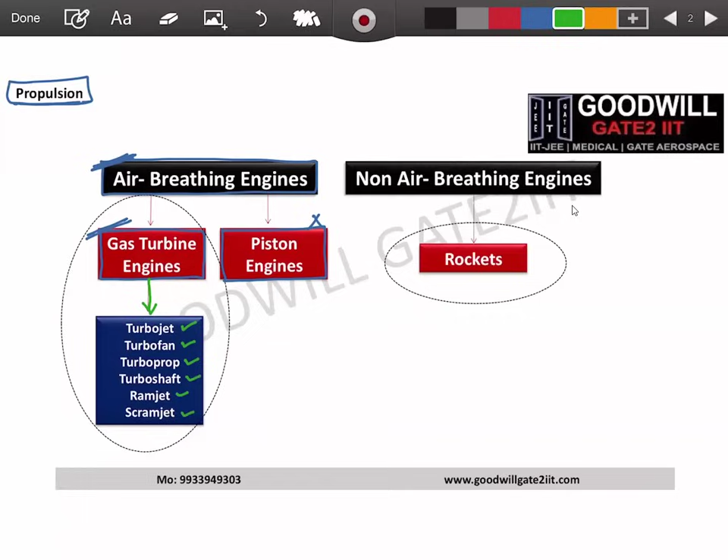So these are basically the two families of air breathing engines. And inside this, maybe you people have heard some keywords. If not, it's okay. We have turbojet, turbofan, turboprop, turboshaft, ramjet, scramjet in the gas turbine engine family, and there are many more, but these are basically coming in your GATE exams, or used in the industry and applications. Although scramjet is not, it's still very commonly asked in GATE. So your aircraft propulsion syllabus will first focus on all of these engines. Each engine we will study separately. This is air breathing.

Now, there is another set of engines known as non-air breathing, which doesn't need air. That means you can travel in vacuum. And the only name which comes to your mind is rockets. Rockets fly in vacuum, right? They go way above the Earth's atmosphere, to the moon, Mars, where we don't have air. So the second kind of engine in our GATE syllabus is the rocket engine.

So two specific engines. Once this whole series is done, ideally you should be able to solve each and every theory and numerical question, and answer all conceptual questions related to these engines, air breathing and non-air breathing. Rocket engines are your second unit, which we will start after finishing jet propulsion.

Now, moving forward, how does a propulsion engine look? A very typical example. This is not how each engine will look; there are small variations. But you will understand in the next 15 minutes how beautifully the engine family is constructed, why you have 5, 6 engines inside it, and how all these make sense. Before going into this complicated diagram, I simply want to tell you one thing, and you people know this.

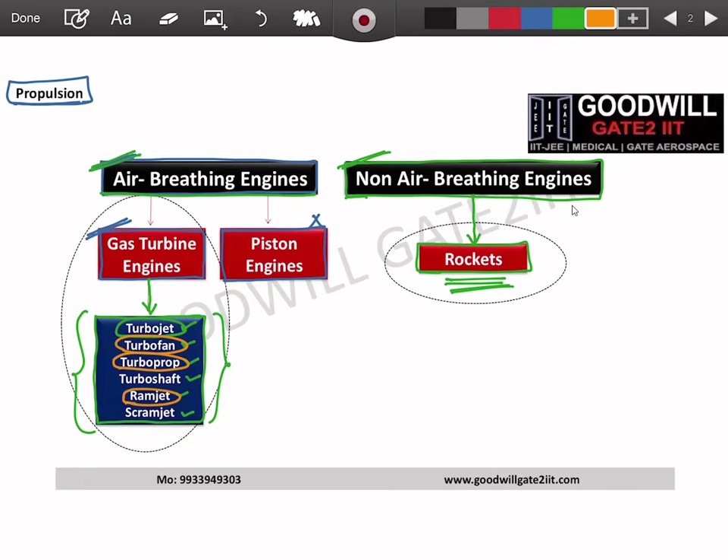So keep this in mind: any engine, whether you talk about turbojet, turbofan, turboprop, typically ramjet, turboprop, turboshaft slightly varies. I don't want to confuse you. Any engine, or even rockets, the primary motive is how you will get this high velocity coming outside the engine, because in the end you want to move forward.

Your whole engine design, and I'm making it very simple for you people, the only task of your engine is to produce this high velocity at the exit. And you will later see, higher the velocity, higher will be what we name thrust, and higher thrust means you will travel faster. And you know, engines can travel at subsonic speeds, supersonic speeds, even at hypersonic speeds.

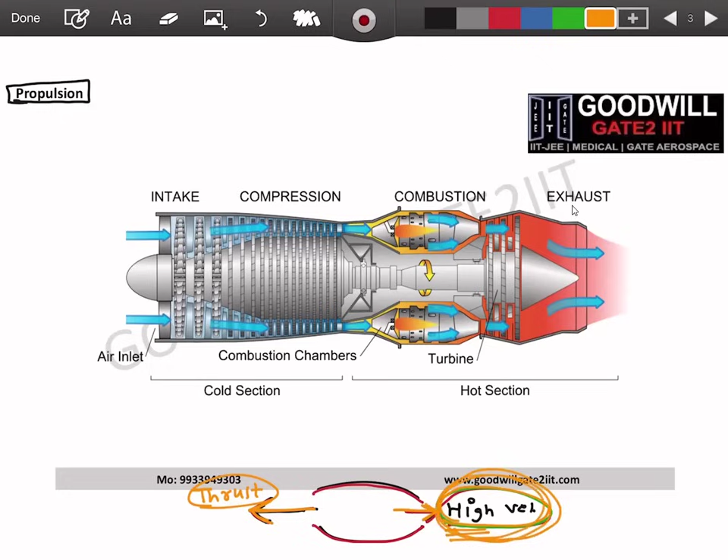Again, if you're not familiar with these words, it's perfectly fine. We'll move ahead. But keep one thing in mind, my whole lecture series on jet propulsion will be focusing only and only on how we're going to achieve this high velocity. All right. Now, to make you understand this, I have taken a schematic diagram of a turbojet engine, but this is just an example. We will talk about all engines.

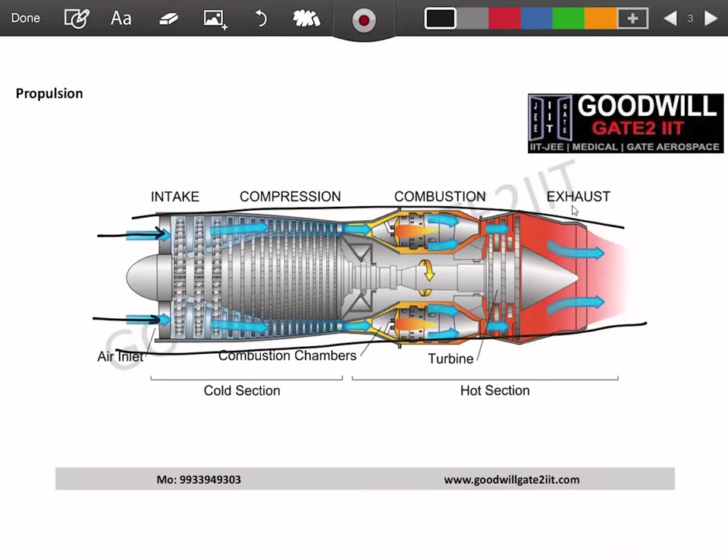So what happens in these engines is your air enters inside the engine. Keep in mind, you're going to put a cover on this engine and then it will be installed in your aircraft. If you remove this cover and look inside, you see some components, and you need not write anything, please. This is just an introduction. We will go into detail of each engine. Then we will write each component, their functions, whatever equations are required. Understand these 10-15 minutes first because I'm explaining your GATE syllabus.

So when your air enters, and everyone knows air enters from the atmosphere, correct? If your aircraft is flying at sea level, you're about to take off, then air from sea level enters inside the engine. If your aircraft is flying at an altitude of 11 kilometers, then air enters at 11 kilometers, or 15, then at 15, and so on. That means this air will have certain properties. I will go in detail about these properties today itself.

Let's say air enters at a velocity of, just as an example, 100 meters per second. As a very basic thumb rule, if this engine is working properly, my velocity at the exit should be, let's say, 500 meters per second. If your inlet velocity is 100 and outlet velocity is 500, this 500 is going to provide you a huge push, and hence this engine will produce what we know as thrust in the forward direction.

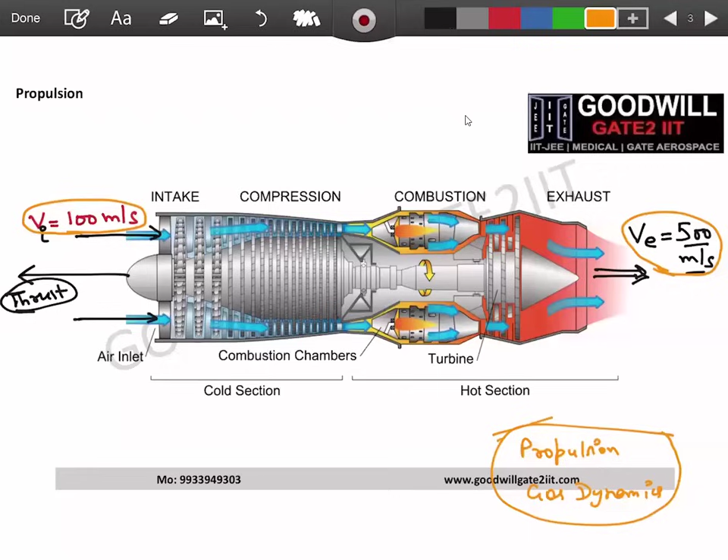That's the whole motive. Now the whole concept of jet propulsion is how you will increase this velocity from 100 at the entry to 500 at the exit. If you understand this, believe me, your whole propulsion and gas dynamics topics are over. Although gas dynamics is part of aerodynamics, both of these subjects only worry about this exit velocity. In the process, you will see shock wave formation, CD nozzles and so on. If you have not heard these terms, please don't worry. It is my responsibility that you understand everything slowly and get conceptually strong.

Now, please see what we will do. If you want to increase the velocity, a quick question to all of you. Do you agree that if your velocity is 100 and at the exit you want 500, I want higher energy at the exit? Guys, yes or no? At the entry your velocity is 100, at the exit you want 500. That means you need more energy at the exit.

Correct? And everyone knows that energy is conserved. Energy can neither be created nor destroyed. This is a thermodynamics law; I'm not going into it because it is not required, at least for today. That means somewhere, somehow, to increase this velocity from 100 to 500, you have to give some energy from outside to the system.

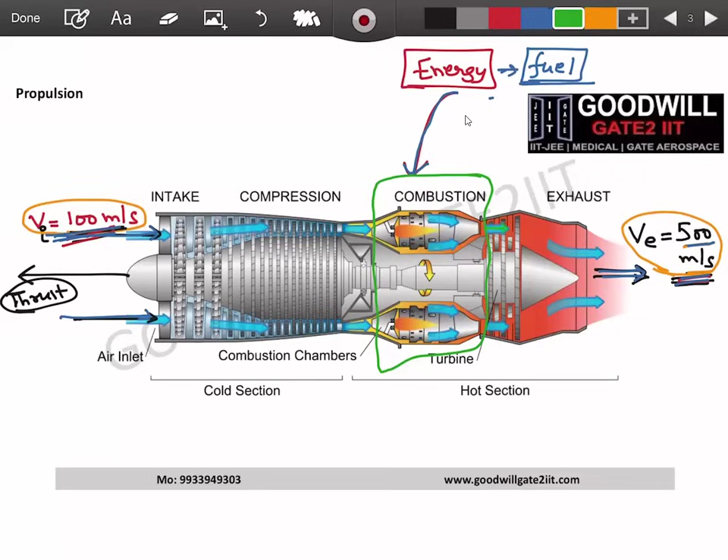All right. So thing is, we are going to burn fuel. So this part, if you see, is nothing but our combustion chamber in which air will enter. You will burn fuel, and fuel burned means more energy. And then with this high energy, you go out. This is fine. So everyone can understand why the combustion chamber is present. But the question is why you need all these components which are making your engine so lengthy and big.

Correct? So the thing is, it works something like this. Please neglect these images for the time being. I'm just taking the help of a slide. Let me take a slide here. So let's say this is your combustion chamber. This box is your combustion chamber. I'm just giving you an example.

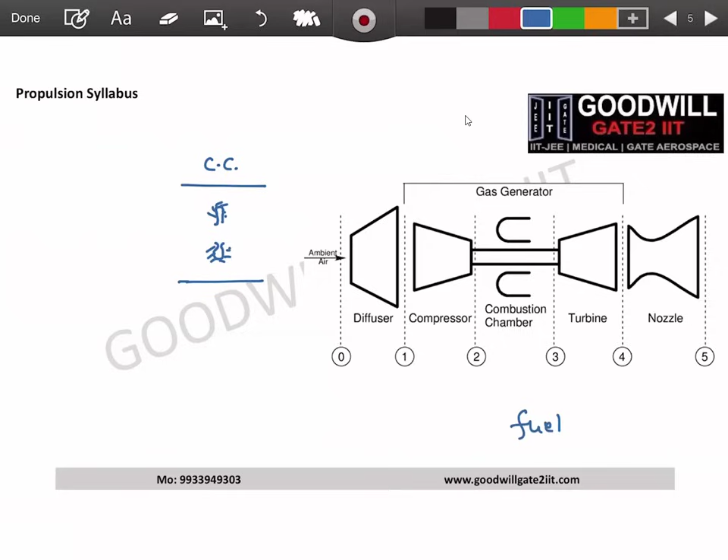And in the combustion chamber, you will put some flames by which you are going to burn the fuel. You need to ignite also, right? And keep this in mind, all fuels can only burn with air because they need oxygen to burn. So air should enter from here.

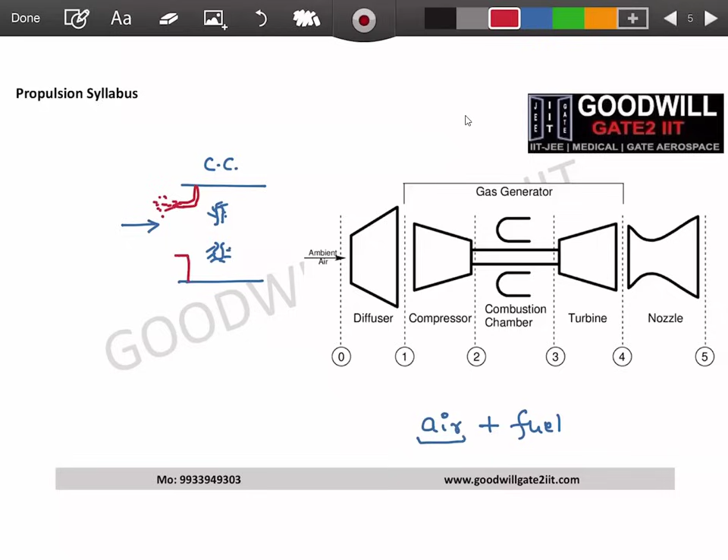Now what we will do is we will put some fuel over it. So we will have fuel nozzles which will spray fuel molecules like this. Your air comes like this. They both mix together, move forward, and you burn them. Once they are burned, you have high energy because energy of fuel is added. All right, this is how it should work.

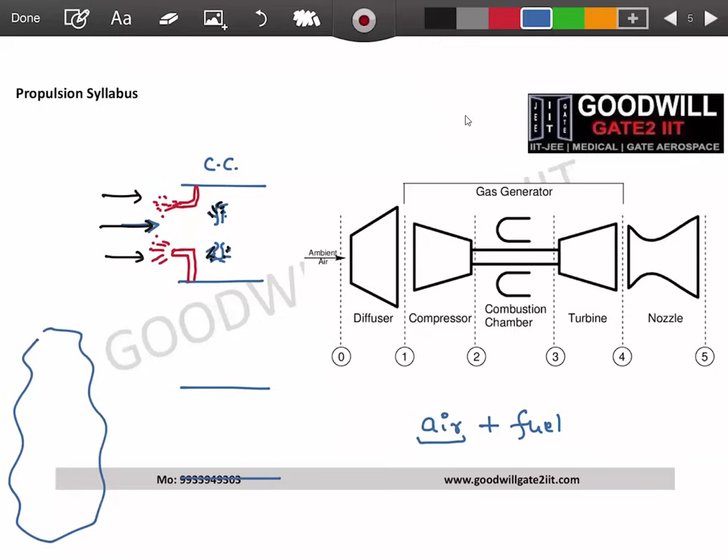Now think in this way. I have a combustion chamber like this, everything same. And now my air which is coming is not coming like this. My air is coming, let's say I have this much amount of volume of air at the entry. This is my air. Air molecules are coming like this.

Now, two things as a designer you people can do. One thing is, if you want to burn this air completely, you should make your combustion chamber very big so that every molecule of air enters. One thing.

Second, what you can do is, and what you have to do is, if you put a fuel nozzle here, which is spraying fuel like this, if this is very big, right, you can imagine that this air will pass without burning with fuel. So you are wasting the air at the entry. Correct, right?

To avoid this, what the designer thought is, let's do one thing. Before entering into the combustion chamber and before adding fuel to it, what we will do is we will compress this air. So the same air is compressed.

This is a very simple word. You have done this throughout your life. If I give you a box or anything and ask you to shrink it, you can just compress it and keep it in a smaller place, right? That's what you people have easily done. So what we have done, we have not reduced the amount of air. We have simply compressed the same volume of air into a smaller volume. But keep this in mind, molecules will remain the same.

At the exit, you will have poisonous gases coming out. You will see combustion chemical equations in the lectures. And if this combustion is not proper, if you people are not doing this compression properly and then this combustion properly, believe me, your aircraft will not be allowed to fly, because at the exit you can have poisonous gases coming out. You will not be allowed to fly with that particular engine. So combustion is a very, very important process.

So to accomplish this compression, so that you can have better compression, what people thought: let's put a compressor before a combustion chamber. And the whole task of this compressor is to compress the air. Even if you see from the entry, right? This is the entry, and at the exit, if you see, your compressor volume is reduced.

Please don't worry, this is just an introduction. You will have each and every answer for each and every statement. Why this compression? Why these number of? Why this diagram looks like this? What are these individual things? Please don't worry about it. I will go in detail. But at least you people understood what this compression is doing before the combustion chamber.

Now, you will learn this, that this compressor will rotate at very high speeds.

Now, it is really a bad idea. I think I need to stop allowing people to annotate. I think some people are annotating on the slide. It's okay. Let's move forward. Just give me 1 second. Okay.

So because this compressor is rotating at very high speeds, what people thought, it's very, very dangerous. Directly air enters and hits these blades. These are very expensive blades, guys. These compressor blades, you will find, are very expensive and very difficult to manufacture. So to make life easy for this person, there is a person before it which simply provides help for the compressor. In simple words, it's like this.

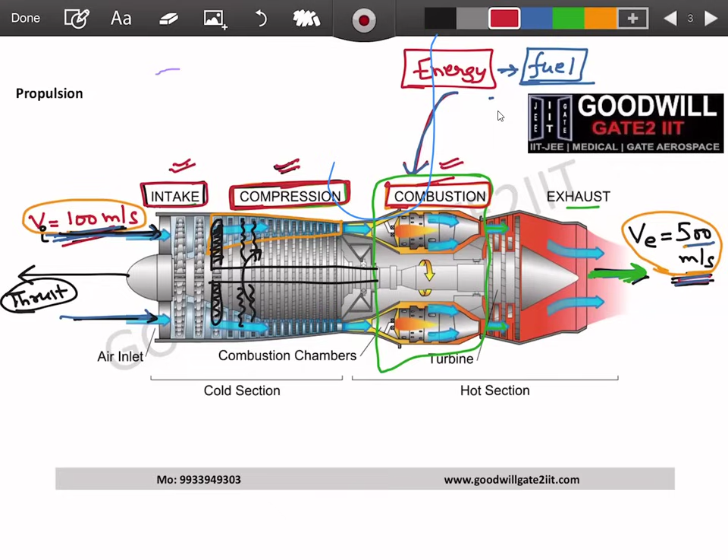Now, I just explained that this compressor is rotating at very high speeds. Correct? If your compressor is rotating at high speed, someone has to rotate it, right? You are not going to sit on the engine of your aircraft and rotate it by hand. It has to rotate on its own, right? And the purpose of the next component, which you name the turbine, is to drive this compressor. So what happens is this turbine will rotate and then this compressor will rotate.

And keep this in mind. Why do you want the compressor to rotate? Because you want to compress the air. And I assume you people don't know why, for compression, you need to rotate. You will learn this shortly. So your compressor needs to rotate, and to rotate it we have installed a person who will help the compressor rotate, which is nothing but your turbine. So after combustion, you have the turbine. Why only after? That also we will learn.

And once all these things are done, you have a proper exhaust pipe. Now this exhaust pipe can be of this shape, and you will learn later it can be of CD nozzle shape also if you want to work with supersonic flows. Again, don't worry about it.

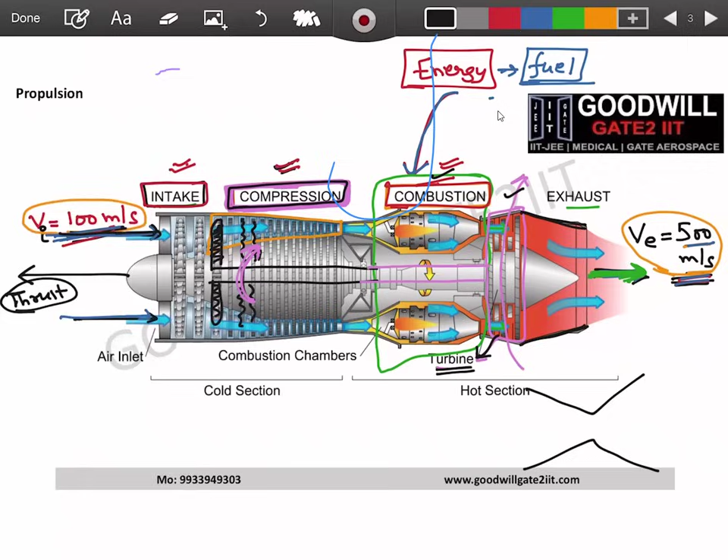So if you broadly see these components, right, you have the intake to help the compressor. The compressor will help combustion. Then you have the turbine, which will again help the compressor. And then to get things out, you have used an exhaust pipe. This is basically the layout of the gas turbine engine family. In 5 minutes only, you will see what different kinds of engines and arrangements you can have.

Now, before going further, give me a quick thumbs up. Is it making sense up till now, whatever I've said? Do you have anything in mind which you want me to repeat? If it's okay, please tell me. We'll move forward. Is it clear for everyone? Perfect. Let's go ahead. Keep this in mind, I have not yet started my topic. Yes, we will discuss this, Divakar. Let's do it very, very slowly.

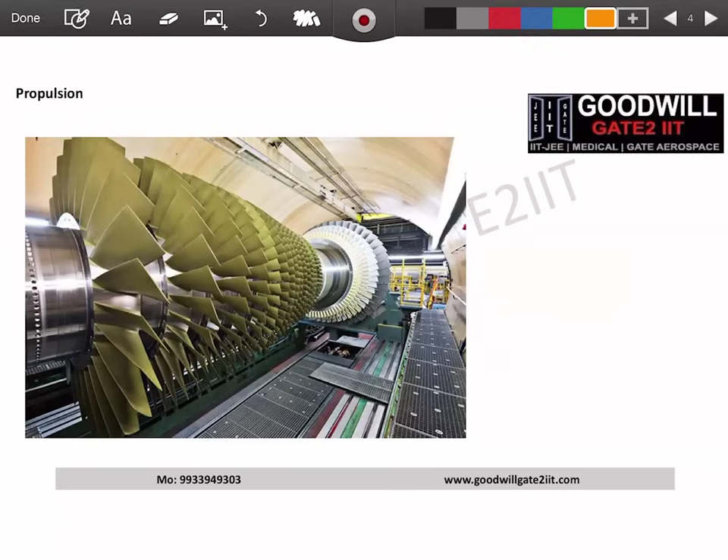So just to give you an example and to give you a feel, this is how an actual aircraft engine looks. This is a schematic diagram, which is basically for understanding things theoretically. If you see the next slide, right? This portion which you see from here till here is basically your compressor.

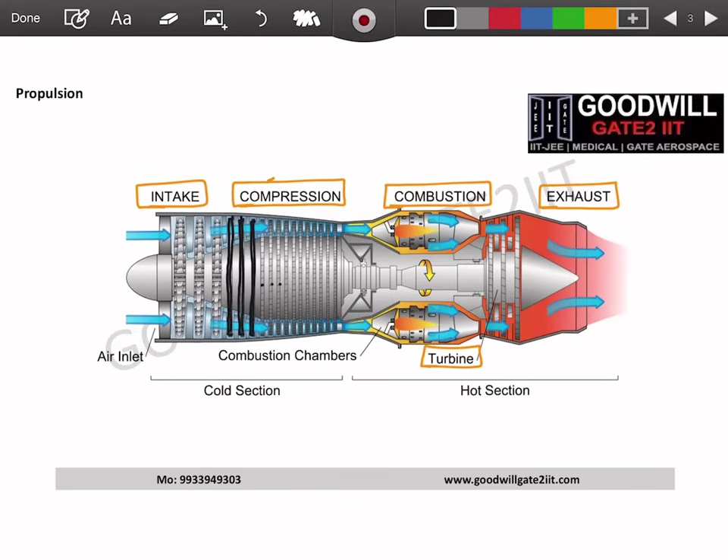And if you see in the compressor, you see these kind of blades, right? And then you see another blade row, another, which in this slide is represented here. You see, they are representing one line here, another line here, another line here, and you have 1, 2, 3, 4, 5, 6, 7, 8, 9, 10, and so many stages to be very precise. This is what's shown here.

Then in this zone, you will put your combustion chamber, because this is open to make you understand. And after this, you will have your turbine, which is again shown here. You can see how huge this engine is. And that's the reason this engine can produce thrust, which can propel your whole aircraft forward. And you have such big, huge aircraft, right? So your engine also needs to be powerful. So this is just an illustration of how it looks.

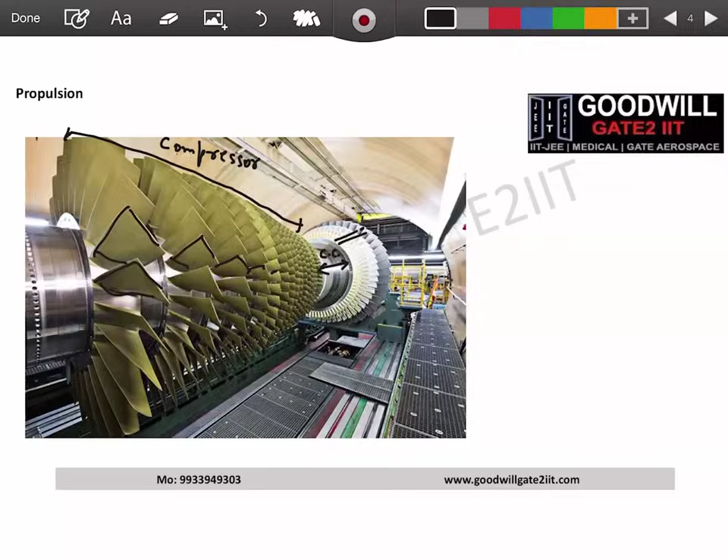Let's move forward. Again, coming back to academics. So the same design I have given here in a slightly easier way. So let's understand what our GATE syllabus is. Why they want you to understand this GATE syllabus, why they want you to crack this GATE exam, and then why this is required to enter into a job after clearing your exam or after doing your higher studies.

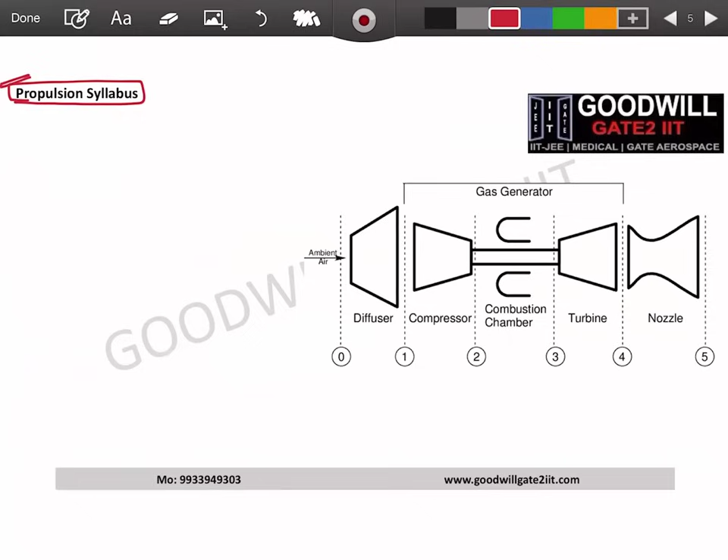Your first topic is known as jet propulsion, which we will start today. This jet propulsion will talk about gas turbine engines, all engines. So turbojet, turbofan, turboprop, turboshaft, ramjet, scramjet, whatever engine is present, we will talk about that engine in jet propulsion. All right, first topic.

Second chapter, if you see in your GATE syllabus, you will find the words axial flow compressor. I hope you understood, because the compressor is an important part of our engine. So we have to study the compressor, right? Why the compressor has so many stages, why the compressor is rotating, how the compressor is compressing the air. You cannot say it is a compressor, so it will compress the air. It has to do something, right, to compress the air. So we will study everything about the compressor.

But the thing is, there is not only one compressor. There are two kinds of compressors. One is the axial flow compressor and one is the centrifugal flow compressor. So in the GATE syllabus we will understand both of these compressors. So this is chapter 2 and chapter 3.

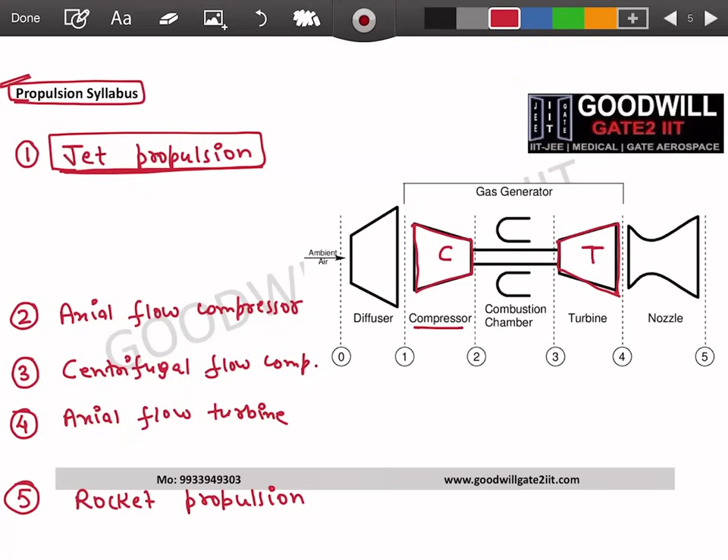And then, last but not the least, we have to talk about thermodynamics, right? Now, this is my way of taking it. Some people might follow a different route. When I start jet propulsion or any topic, I will make sure that all thermodynamic concepts are covered at the start only. So we will talk about isentropic flows, Brayton cycle, internal energy, enthalpy, entropy, all these things while doing this particular topic itself. But still, eventually, you should know thermodynamics. And in your GATE syllabus, you will find basics of thermodynamic principles mentioned.

Now, compressor is done, turbine is done. We have to study the combustion chamber, right? So if you want, you can name it as a separate chapter, but I will study the combustion chamber in chapter 1 only, because typically this is provided in all standard textbooks in this format. But if you want, you can name it chapter 7, combustion chamber. It's altogether a separate component, right? So we will study the combustion chamber. We have to.

Then we will study the intake. Again, 100% we have to study the intake. You will see it is also known as diffuser. It is also known as inlet. Inlet, intake, diffuser, all are the same keywords. So we will study this again in chapter 1. And then we will study nozzles, which is our last component. So we will go in detail into compressor, turbine, combustion chamber, diffuser, nozzle. And then once you have studied everything, we will talk about all sorts of engines. We will combine them and talk about the turbojet.

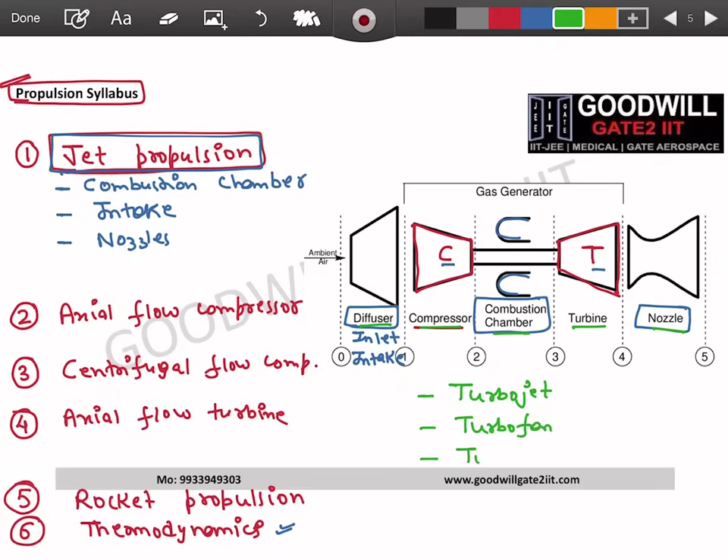We will talk about turbofan. We will talk about turboprop. And typically we will talk about ramjet. All of your GATE numericals from 2007 till 2025 will work on these three engines. There is only one question asked on turboprop, and believe me, that was just based on efficiency. So they have never entered into this.

And one theory question, out of all these years, only one theory question was asked on scramjet. So although we will cover this, we will understand the physics, we will solve some numericals, but only one question was asked on turboprop for 1 mark, one question asked on scramjet for 1 mark. All remaining questions are asked on these three engines.

And once all this is done, we will talk about some topics like afterburner. If you have not heard about this, keep this in mind. This is like producing extra thrust by burning more fuel. Maybe you have seen fighter aircraft producing very high thrust by burning a very large amount of fuel, and you can see a huge amount of flame coming outside the engine, right? That is typically afterburners, and we will talk about optimization of turbojet, turbofan, and so on. Many things will come.

Give me a quick nod, guys, and tell me if I'm making sense. You are following me. First thing, is your syllabus clear to you? There is no confusion in this. Because when you're starting anything, you should be clear what you're going to do for the next coming days, right?

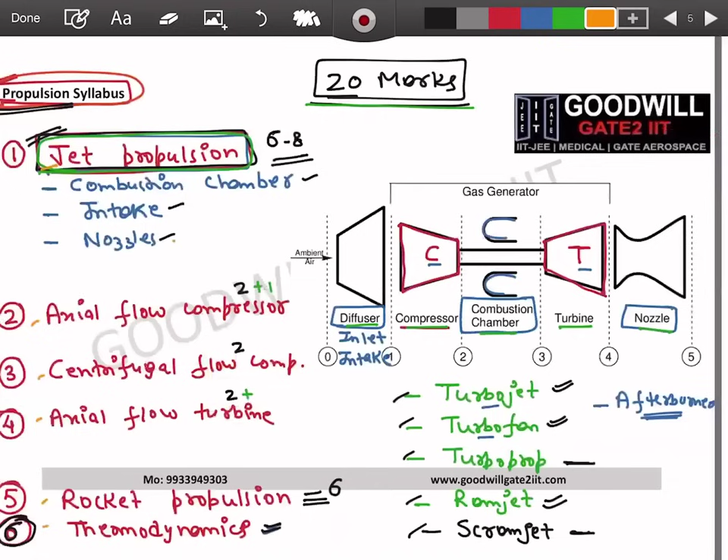I have already covered this part, which I have written here, rocket propulsion. And in rocket, you will learn all these things. Why you have first stage, second stage, third stage, why multi-stage rockets are designed. What do you mean by payload? What do you mean by strap-on motors? What do you mean by fuel and oxidizer carrying? And all these dual launch adapter, or every keyword you will understand in rockets.

And eventually you will learn at what velocity you should fire your rocket if you want to go to moon, or how much fuel you need, how much oxidizer you need if you want to go to Mars, how much fuel and oxidizer you need if you want to go to moon, or if you just want to launch a satellite in an orbit, low Earth orbit, or in a geosynchronous orbit. All these calculations will be done in rocket propulsion.

And believe me, guys, once you people are really good in rocket propulsion, after understanding this, they have beautifully framed your syllabus to transit to what is known as space mechanics. This is a separate subject for your GATE, but keep this in mind. Once your rocket is ready, then only you can go to space, right? And then space mechanics will tell you how you will go.

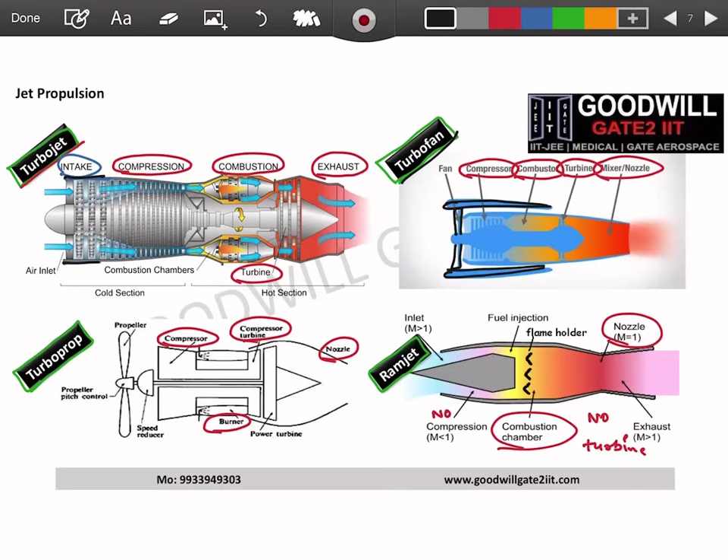If you see turbofan engine, what you're going to do is you will install a big fan inside the engine cover. And this is the engine. Believe me, guys, if you go to any airport, 99% of the times, the engine you are going to see is turbofan engine. When you're moving from Delhi to Bangalore, Mumbai, anywhere, local flights, you will typically be seeing turbofan engine. Even for international flights, you will see all turbofan engines. 99.9% aircrafts, you will see turbofan engine.

So the only difference between turbojet and turbofan is that you have simply installed a fan before entering inside the engine. This is a fan. That's it. Now, if you remove this fan and put big propeller blades outside the engine cowling, keep this in mind, there is a basic difference. In turbofan engine, your fan is inside the engine cover. In turboprop engines, your engine cover is this, and then you have extended your fan outside and you have big propeller blades outside. You have seen these kind of engines also in your life. You have seen them at the airports also, but very rarely.

So turbojet, put a fan, it becomes turbofan. Remove the fan, put big propeller blades, you have turboprop. And remove fan, propeller, compressor, turbine, what you have is a ramjet. You will not see this because typically this is used in missiles.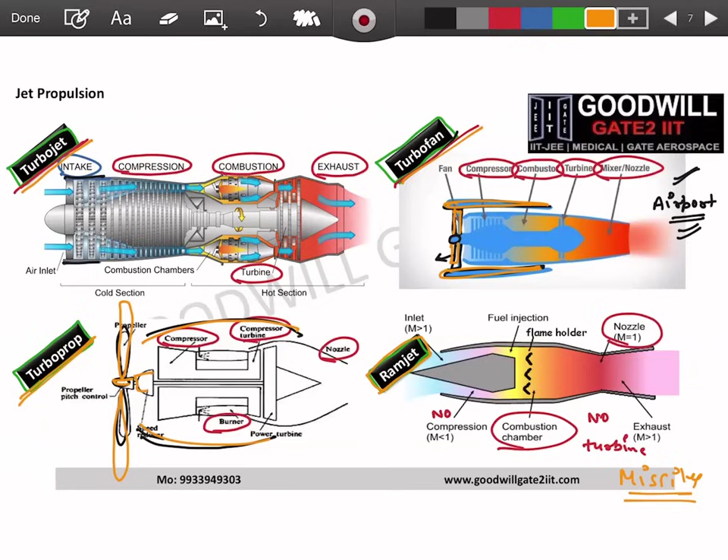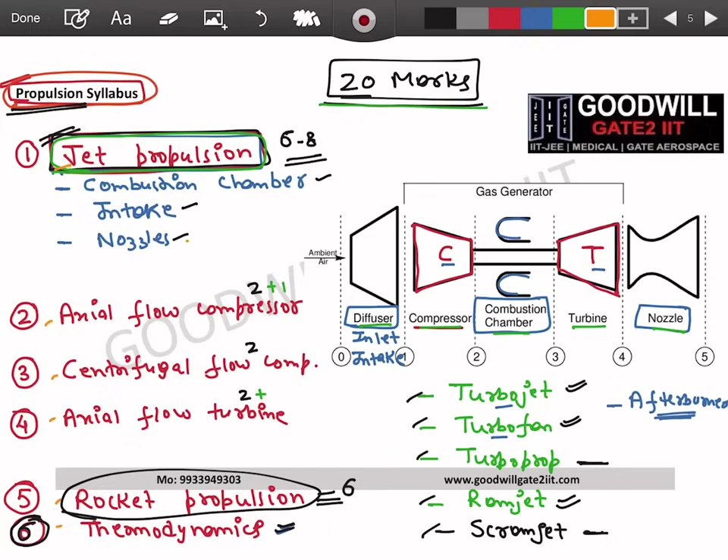And that's how, to make you people understanding and good in concepts for all these engines, now you people can see how beautifully people have framed this GATE syllabus, so that once you are done with this, you are ready for the interviews, you are ready for the job, you are ready for the GATE exam, even if you want to write HAL exam, DRDO entrance, anything, you are ready if you have done all these things because you are ready with the concepts.

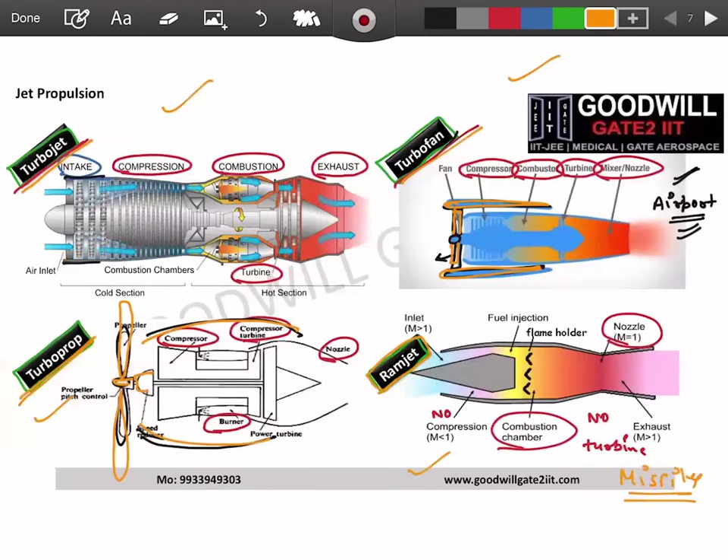Now, next slide is we will start our first chapter, which is jet propulsion. So today my lecture is starting unit 1, and we will cover all these things which I have mentioned here. But now I am zooming into this syllabus and we will discuss this.

Tell me, guys, give me a quick nod if this is okay and fine for everyone. And give me 1 minute. I'll be back, guys. Please respond, guys. Okay. So if no doubt, let's move forward then.

So this is our chapter 1, and we will be talking about all these engines. I hope you people understand the keywords now. I'm not going into each heading, but we will talk about thrust equation. We will see this now itself. Then we will talk about efficiencies. If you see here itself, we'll talk about diffuser. Here we'll talk about nozzles. So both topics covered here.

Here only we will talk about combustion chamber and its chemical equations, which is from 2015 and 16 till 2025. Every year there is one question on this chemical balance. Even in 2025, 24, 23, 22, every year there is one numerical on this. I will show you the numericals.

Once we study all this, we will enter into turbojet. We will optimize the turbojet engine, make it good. We'll go to turbofan, optimize it. We will go to ramjet and turboprop. Once all these engines are ready, we will talk about thrust augmentation. This is nothing but afterburner. There are other processes also, but in your new GATE syllabus, they have updated the keyword as afterburner, but thrust augmentation is a catchy word.

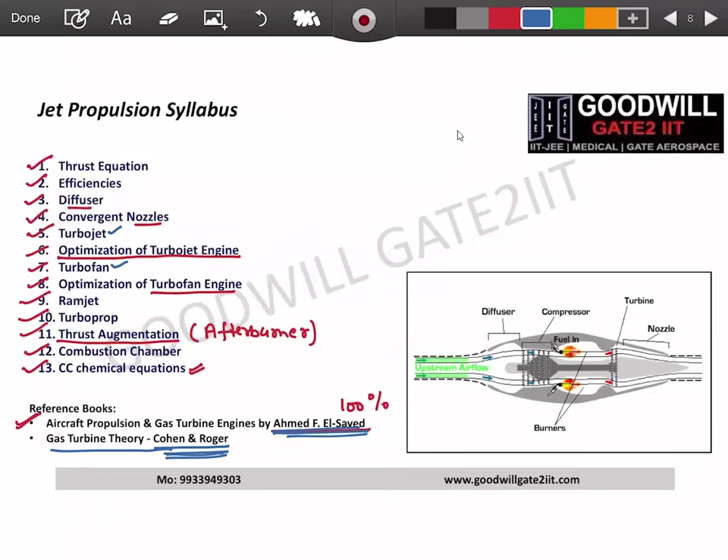But if you're doing it on your own or you want to read books, these are the two books which I feel. People try to follow Ganesan. I strictly say no, at least for jet propulsion. Ganesan is a good book for compressor and turbine, but absolutely no for jet propulsion. It is very basic. It will not help you to solve your GATE numericals. Now, once I finish any lecture, I will come back to this slide and we will mark the topics which we have covered on that day.

All right. So now I'm starting the topic of jet propulsion. So first thing is how thrust is being produced. All right. So as I told you, let's say as an example, this is any kind of engine, any engine. Let me zoom this. Now it can be anything. I'll take an example of turbojet for easiness.

When this engine is flying, air will enter inside this and gases will come out. Why am I using the words air and gases? Because in the combustion chamber you have burned the air, and air is no longer air now. It is being burned and gases are being produced. Yeah, fuel is added. All right.

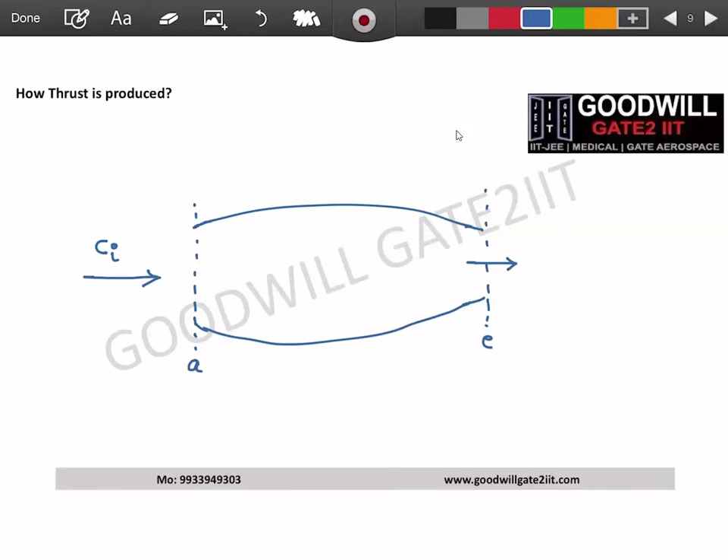So when air enters inside the engine and exits, typically in most books you will find this convention. Either you will find these conditions as A. A means you're standing at the entry of the engine. Sometimes you will find this as I also, inlet. So sometimes you will find this suffix I also. Anything, please don't worry. Now air enters with certain velocity, so you can say CA or CI. I'm writing both so that you people are comfortable. It can be anything. So this is the velocity with which air enters inside the engine.

Now, air enters inside this engine with a certain amount of mass flow rate. Now, what is mass flow rate? It is the amount of air entering every second, kg per second, right? So if, let's say, this is 10 kg per second, then 10 kg of air is entering your engine every second. That's the meaning of mass flow rate. So in propulsion, we will never talk about mass. We will talk mass flow rate: how much mass is entering or leaving every second. So it enters at a certain mass flow rate.

And definitely your air will have some kind of pressure. So we will say PA. Atmospheric pressure you can keep in mind. People also use the word ambient pressure. All these are the same thing, some catchy words just to confuse you, nothing else. And similarly, temperature of air. So basically, I have written some properties of air with which you are entering. Then you leave this as gases, and keep this in mind: in between, you have added fuel.

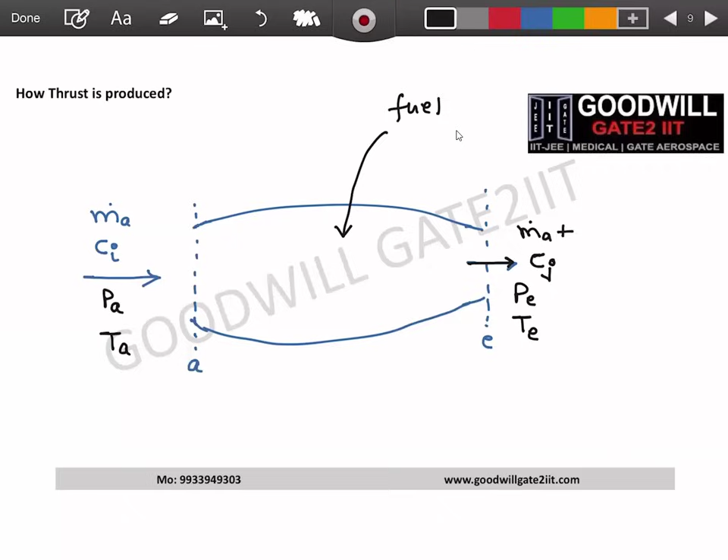And this is a question from my end to all of you. What will be the mass flow rate coming out? So do you people agree? Not constant. Mass flow rate of gases, I agree. But what is the mass flow rate of gases? Can I say it is nothing but mass flow rate of air plus mass flow rate of fuel? Because fuel is added, and this is how much fuel you are adding every second. So air enters, fuel enters, they both add up and come out as gases. Then the mass flow rate is Ma plus Mf, right? Give me a quick thumbs up if you are fine with this. Correct, right?

Now, if this happens, your exit velocity is higher, your inlet velocity is lower, and this is how thrust is produced, which is captured using the thrust equation. Now I'm giving you the equation. Please listen carefully. Thrust is nothing but a force, and we are representing it as F. If you want, you can represent it as T; no one will say anything. I'm just following standard conventions. In books you will find this kind of equation, and I will explain each and every term here. Just be with me.

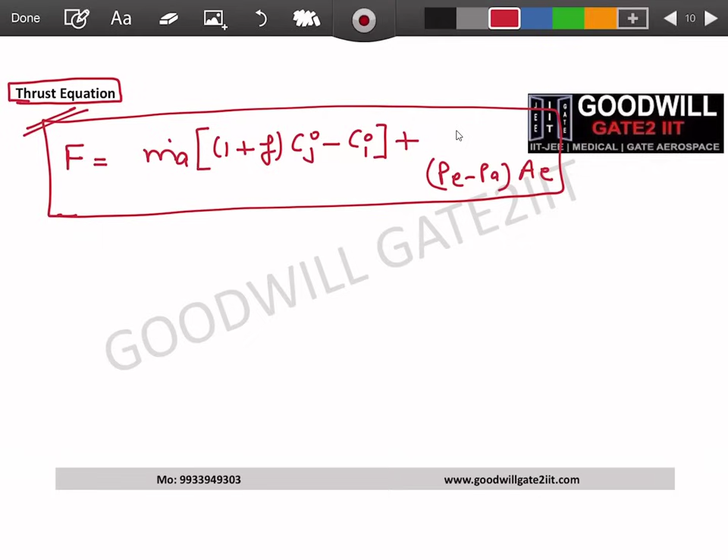This equation, which I have written here, is known as the thrust equation. And this equation will give you how much thrust is being produced by that particular engine. Now, let's try to understand this. First of all, keep in mind we are talking about the gas turbine engine family. The main reason of thrust production,

and keep this in mind, guys, these are not basics. Everything of this is asked in your exam. I'll show you the questions; even in 2025 you will find questions on this. We are straight away starting the topic, which will help solve GATE numericals a lot. On this equation itself, you will have more than 20 questions in your GATE exam. So thrust basically consists of two parts. The first part, and I will go into detail on both, is known as momentum thrust.

The second portion, which you see, is known as pressure thrust. So total thrust is a combination of momentum thrust and pressure thrust. Now, what is momentum? Momentum, if you see the first part only, is mass flow rate into velocity.

Now, if you people have confusion here, absolutely fine. I am writing one equation for your notes. You will understand the meaning of momentum. So let's write F momentum. Momentum coming outside the engine, that means at the exit, is mass flow rate at the exit into velocity at the exit. So this is momentum at the exit

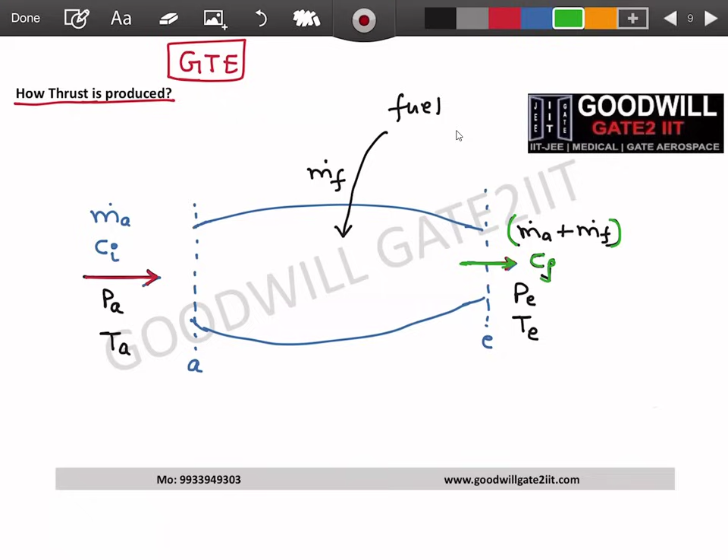minus momentum at the entry. Momentum at the entry is mass flow rate at the entry into velocity at the entry. And that's what is known as change in momentum. So your gas turbine engine works on the concept of change in momentum. If you have change in momentum, you will produce thrust. Let me write this equation.

So your exit momentum is (m dot a plus m dot f) into velocity at the exit, which is Cj, minus momentum at the inlet, which is m dot a into Ci. So exit minus inlet is nothing but change in momentum. And this change in momentum is what is known as momentum thrust. Now the question is how this equation looks like this.

Understand this now. From this equation, I'll take m dot a outside. If you take m dot a outside, here you have 1, this becomes m dot f divided by m dot a, and you have Cj here, and you have Ci here. And keep in mind, this is also a bracket. I hope you understand. If there is any issue in maths, please tell me. So I've taken m dot a outside, and you end up with this equation.

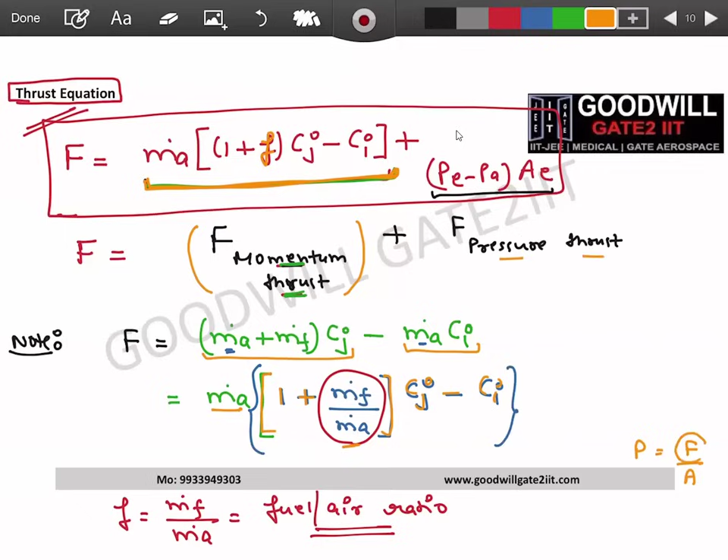If you write this equation directly, it is not easy to digest. But if you write exit momentum minus inlet momentum and then simply take m dot a common, you end up with your momentum thrust. So you have the first component, momentum thrust, ready. The second component of thrust is pressure thrust. You people know pressure is force by area, right? This is our basic equation. So if you want to calculate any force, you need to multiply pressure and area. Correct?

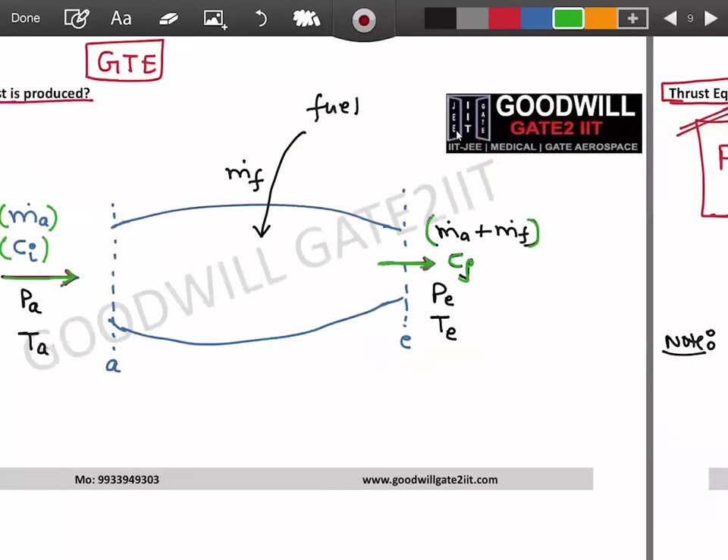If you see, you have done the same thing here: pressure multiplied by area. But which area? Your gases are coming out from this area, right? This is your exit of the engine, so we'll represent this as exit. Now this may be tricky to start with, but keep this in mind. PE is the pressure of gases coming out from the engine, and it is going into atmosphere, right? Atmosphere has the same pressure PA here and PA here. Your aircraft is flying in the same atmosphere.

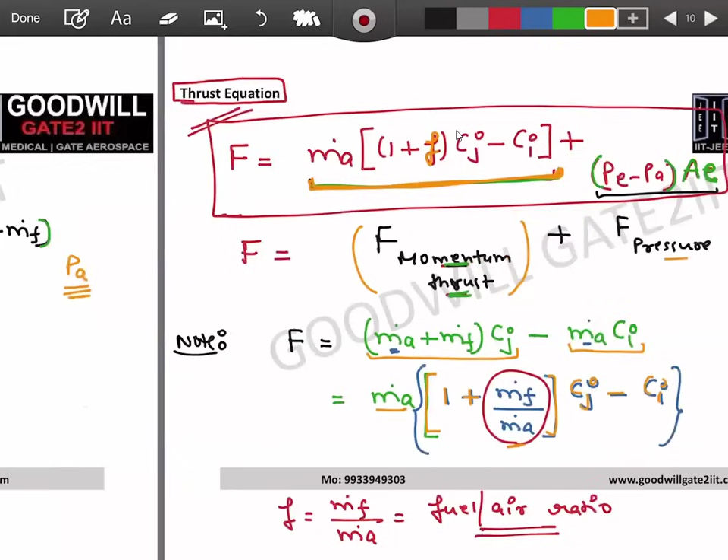At the front of the aircraft or at the back of the aircraft, your air properties will remain the same, right? This pressure difference, PE minus PA, is going to create an additional thrust, which we name pressure thrust. If you combine these two, you have total thrust produced by the gas turbine engine family. Now, please listen carefully. When I gave you the thrust equation, I did not use any engine name. So this equation is valid for turbojet, turbofan, turboprop, turboshaft, ramjet, scramjet, the entire family.

Please don't change this equation. Even a rocket will also work on this. We will see small changes here and there, but the backbone equation will remain this. And this is how the thrust equation of the gas turbine engine family looks, having two components: momentum thrust and pressure thrust. Pressure multiplied by area. Momentum means mass flow rate into velocity.

You know what each and every term is here. This is mass flow rate. This is fuel air ratio. This is velocity at the exit, velocity at the entry, pressure at the exit, atmospheric pressure, area at the exit. I want each one of you to respond on this. Please tell me, guys, is this making sense? Are we absolutely clear up till now?

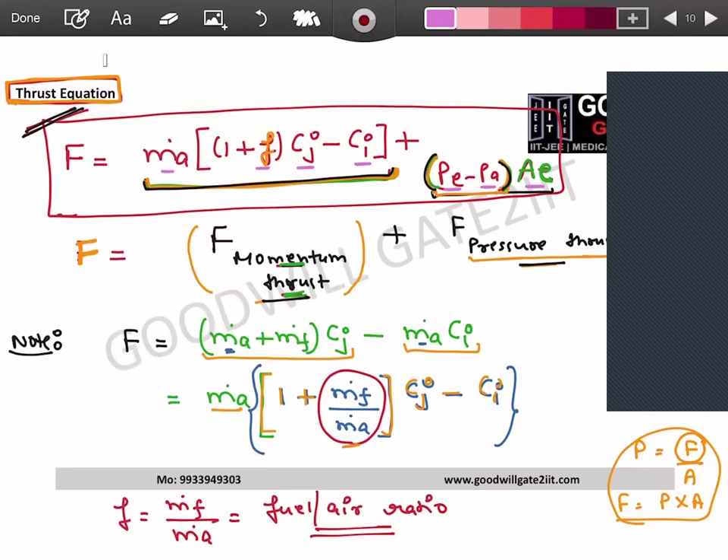Absolutely clear, right? Good that it is clear to you people. Okay. Guys, you people can see the screen, right? I hope everyone can see the screen. I think it should be visible now. Now you people can see, right?

Okay, perfect. So we know something about at least how thrust is being produced, and the same thing I have discussed in the thrust equation. Now, before going into static and stagnation properties, and before going into all these isentropic processes, let me explain a few things. Every engine will have an efficiency, right? So again, let me not write it as turbojet. Please don't worry about these headings, guys. Ignore this.

Let me talk about efficiencies. Now, every engine should have an efficiency, right? And you want to design efficient engines. You want to have an efficient car also. You want to have an efficient two-wheeler also. Always you talk about efficiencies, right?

Wait 1 second, I'm putting a charger here. Yeah.

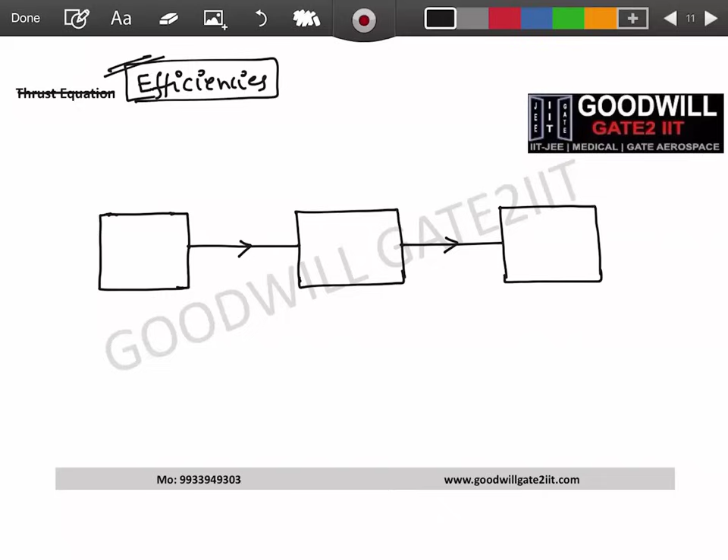So the first thing your engine produces is known as heat power, heat energy. And this heat energy is basically given as how much fuel you are burning. More the fuel, more the energy. Correct? Multiplied, you will find this term CV. Now, this is known as calorific value of fuel. This is also known as quality of fuel. This is also known as heating value of fuel.

In simple words, understand one thing. If you use high quality fuel, energy will be more. If you use more quantity of fuel, energy is more. If you use petrol, your energy is different. If you use diesel, your energy is different. That is why quality of the fuel matters. Higher quality will give you more energy. So, quality of fuel multiplied by amount of fuel gives you what is known as heat power. This is the energy which we are giving to the aircraft.

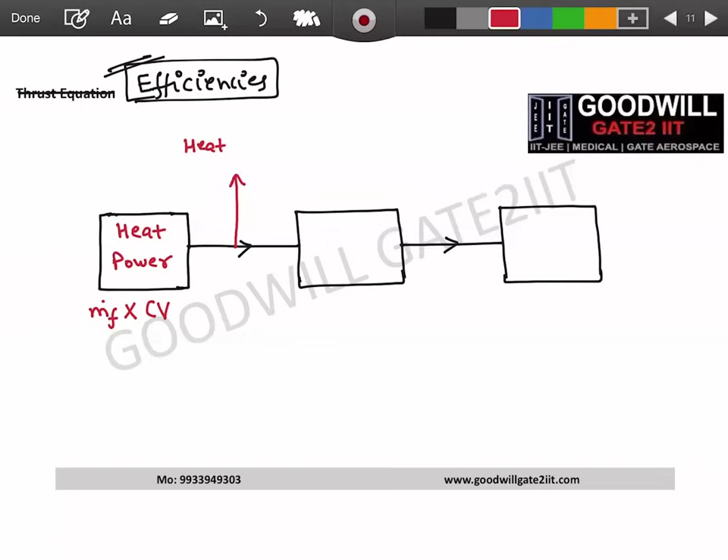Correct? But the problem is we cannot utilize all the energy which we produce. Why? Always in reality, you have heat losses. So what happens? Some amount of energy is lost to the atmosphere, and this is because of conduction, convection, radiation. You cannot get 100% efficiency, right? So there will be absolutely some heat losses, and that is bad. Now, after these heat losses, the remaining energy we have is known as engine output power.

Engine output power. Now, this is the energy which is left after heat losses. But again the problem is that we don't have all this energy to utilize for moving our aircraft. We have further losses. To be very precise, these are mechanical losses. There is a catchy word for it. People say these are kinetic energy losses. I'll give you a simple example.

In your engine, you have the compressor rotating at high speed, the turbine rotating at high speed. All these systems are resting on bearings. Your shafts are rotating. Every component has some losses, right? You cannot design a 100% mechanical system. And hence, these losses will also eat your energy. And the remaining what you have is known as thrust power.

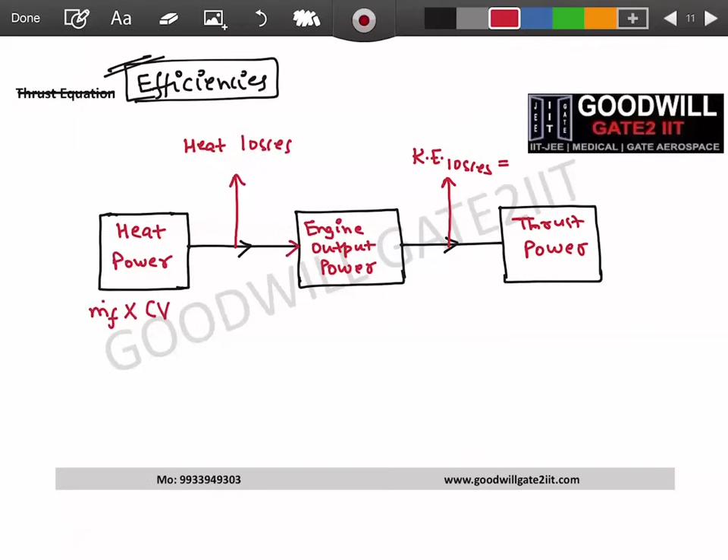The remaining energy you have is known as thrust power. This is the energy which is available to us to fly. With this energy, you can make your aircraft fly, guys. Keep this in mind: you are burning this much fuel, you are getting this much energy, but the useful energy which you have after all losses is known as thrust power.

Now we need to write expressions for this. Correct? So the first efficiency defined for aircraft is the ratio between thrust power to engine output power. Efficiency is output by input, right? So output is thrust power, input is engine output power, losses are kinetic energy losses. If you take the ratio between these two, I will write all these efficiencies in detail. Let me first draw this in a table. This is known as propulsive efficiency, eta P.

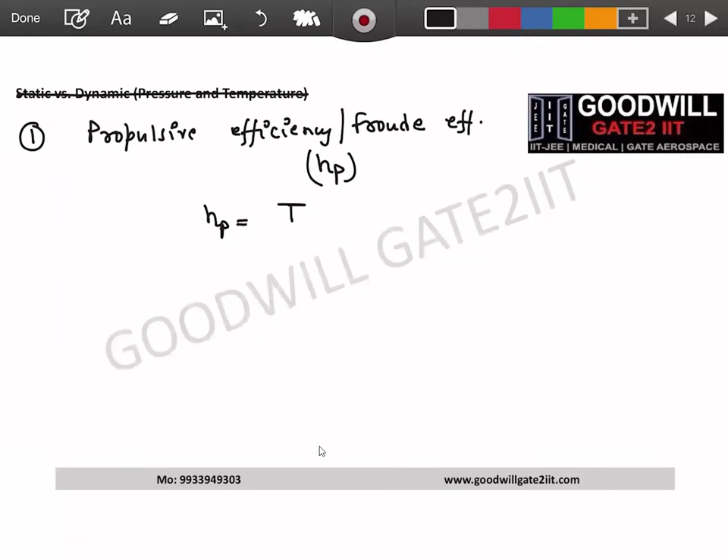So the first efficiency I'm talking about is known as propulsive efficiency. This is sometimes also known, because of the name of the scientist, as Froude efficiency. It's the name of a scientist, guys. And this is denoted as eta P. So what is eta P? This expression itself is asked in your exam. One basic expression is, it is the ratio of thrust power to engine output power. That's how the efficiency is defined.

Now, don't forget, I will go into a detailed derivation for this. All right, just give me some time. Just be with me and try to follow as much as possible. If at any time you have a question or a doubt, please stop me. I will try to go in detail. I will try to explain. I will answer your question, Vedika. Just give me a few minutes. I will write each and everything.

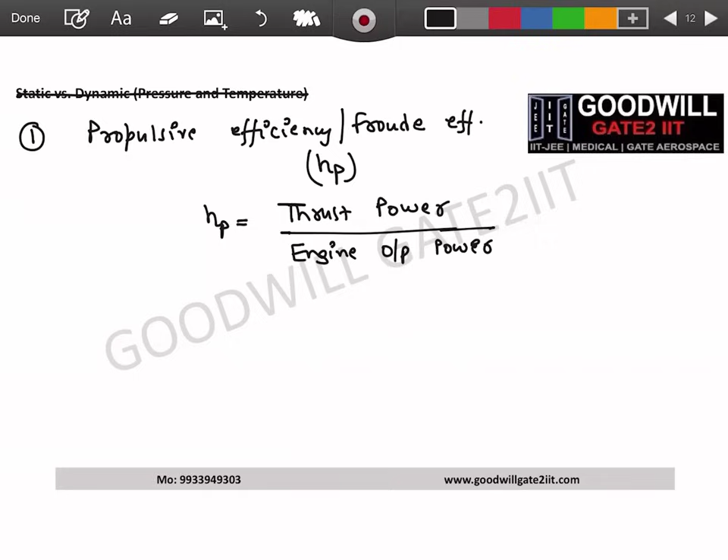Now, if you take the ratio between engine output power to heat power, this efficiency is known as thermal efficiency. It is taking care of thermal losses, right? So the ratio of engine output power to heat power is known as thermal efficiency. So the next efficiency we're going to define is the thermal efficiency of the engine, and it is denoted as eta th. If you define it in a formula, this is engine output power divided by heat power.

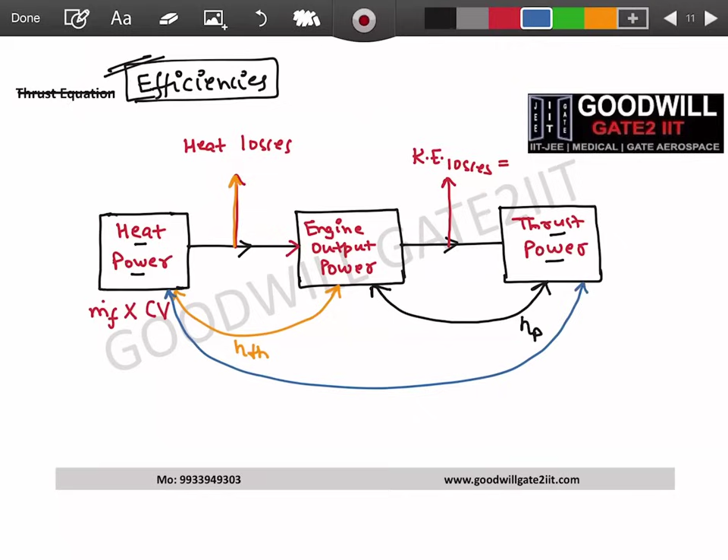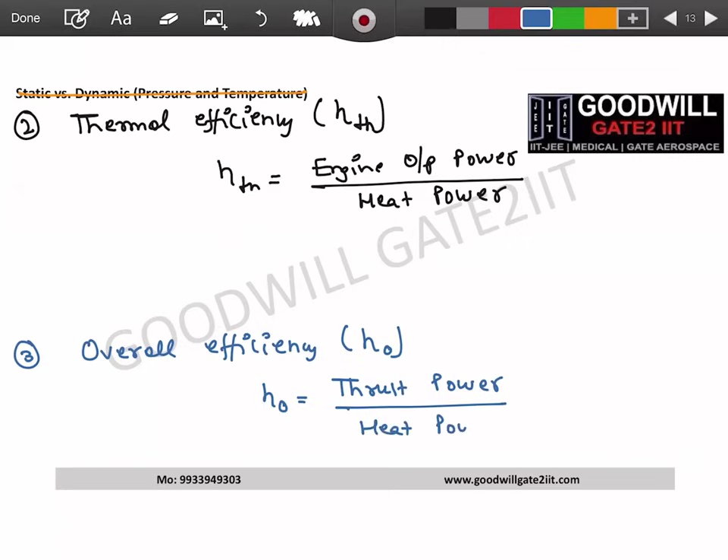This is the second type of efficiency defined for any gas turbine engine family. They will ask thermal efficiency directly, they will ask propulsive efficiency directly in your exams. At least we know some basics now. Then, if you take the ratio between thrust power to heat power, this is known as overall efficiency. I'll write it here as overall efficiency of the engine, eta O. If you just learn from the formula, I think it is easy for you people now. This is nothing but thrust power divided by heat power. Correct?

Now, coming back to more detail about this plot. So first, you people understood what heat power is. Heat power is m dot f into CV. Just for your ease, and Vedika, to answer your question, CV here is the calorific value of fuel. This is also known as the heating value of fuel. You will find all these words in your GATE questions. You can also name it as quality of fuel. I hope, Vedika, you got your answer. So this represents what quality of fuel you are using in your engine. Is this clear, Vedika?

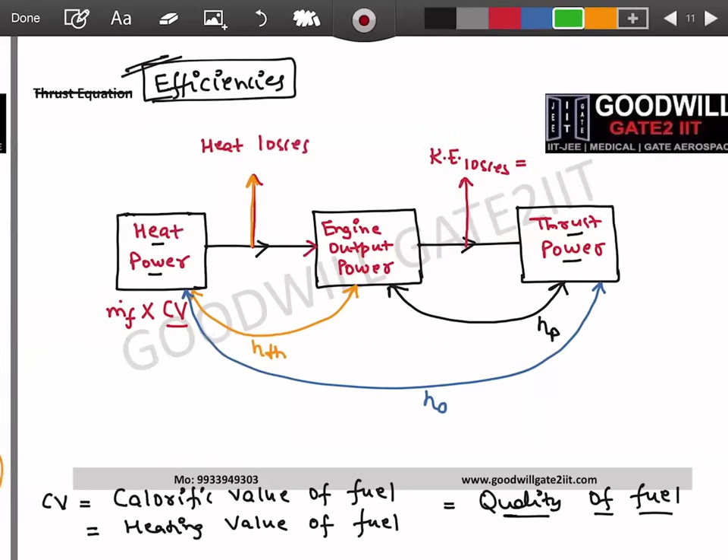All right. Now, moving forward. What is this thrust power? We need to write expressions, right? We know thrust is denoted as F. Thrust power is known as thrust multiplied by the velocity of the aircraft. If you see, CI is the velocity of air entering the engine, and the velocity of air entering the engine is nothing but the velocity of the aircraft, right?

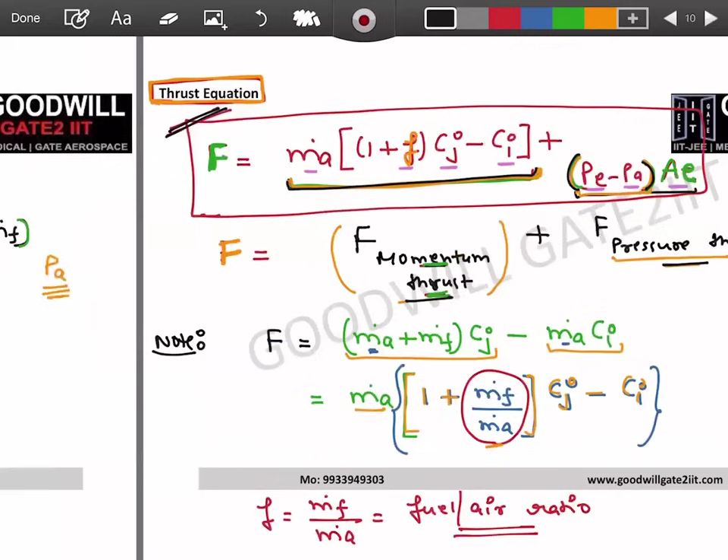See, when you have an aircraft, your air is still and your aircraft is moving forward with a velocity of CI. So air enters your engine with a velocity of CI. That's the reason it's one and the same thing. So in your exams, when they say the aircraft is flying with a velocity of this much, that means they have given you CI. So velocity of air or velocity of aircraft is one and the same thing. If you take thrust and multiply CI to it, you will get what is known as thrust power.

All right. Now, what is propulsive power or what is engine output power? Now, engine output power, again, we will do these kind of small derivations here and there if it is required. For time being, let me fill this table so that you can just remember this image in your mind and you can answer all efficiency related questions in your GATE exam. And this is the easiest way to learn efficiencies also, right?

Engine output power is basically half m dot a, which is mass flow rate of air, into Cj square minus Ci square. This is known as engine output power. Write it. We can write this expression later also, and we can derive this expression also. Now, engine output power, if you people agree, gives you some kinetic losses, and in the end, you have thrust power.

Although not required, I can easily skip this part. No one will ask questions on this in your GATE exam also, but I can write this expression for your complete theory. This kinetic energy loss is basically half of m dot a into Cj minus Ci whole square. Just see the difference between the two, guys. Propulsive power or engine output power basically is Cj square minus Ci square, whereas kinetic energy loss is Cj minus Ci whole square. I hope you understood the difference. Sometimes people find that these two are exactly the same thing, but they are not.

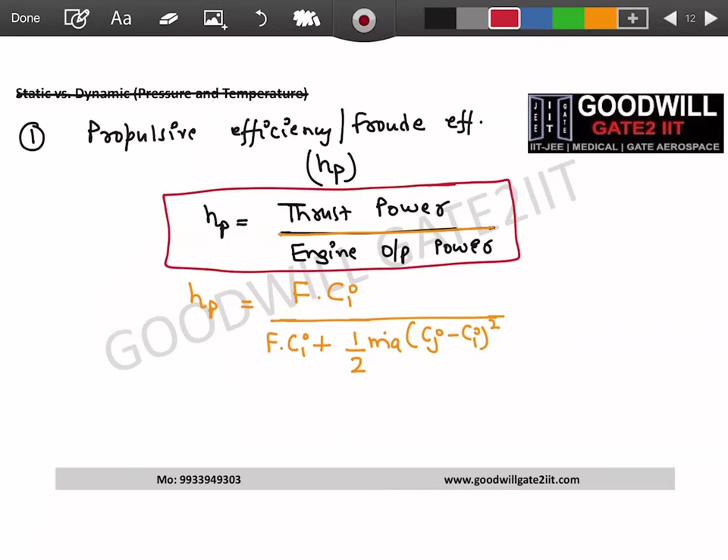So engine output power I am writing as thrust power plus my losses. Losses are half of m dot a into Cj minus Ci whole square. I end up with this expression. Now again, anything which I box, you have to learn for your GATE exam. So this basic formula you should know. Whatever derivation I'm doing is for your understanding. You can skip this derivation. The final expression which we will get, we will learn that expression.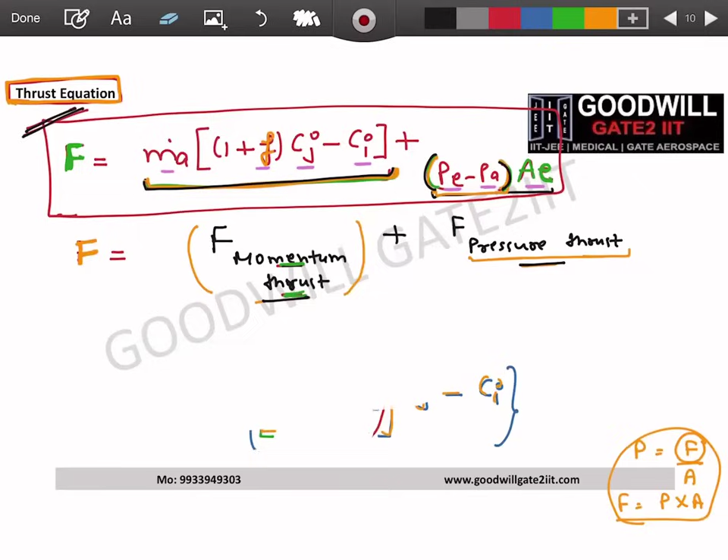All right. Now, guys, please listen to this. This is an important note. I should have done it before, but let's do this note now here itself. Most of the times in your GATE exam, very, very important note, or you can mark this as 100% for your GATE exam. The note is, if in your GATE exam they say PE equals PA. Now, what is PE and what is PA? PA is the pressure of gases in the atmosphere where your aircraft is flying. And PE is the pressure of gases which are coming out from your engine.

Although this is known as optimum expansion, I don't want to confuse you now with these words. Let's say in the exams they say your gases are coming out at the same pressure which is present outside. In this case, can you people tell me what happens to this pressure thrust? If PE equals PA, your pressure thrust will go to zero, right? So if this note is given in your GATE exam, let me write it, but don't worry, I will explain this in detail. This is known as optimum expansion.

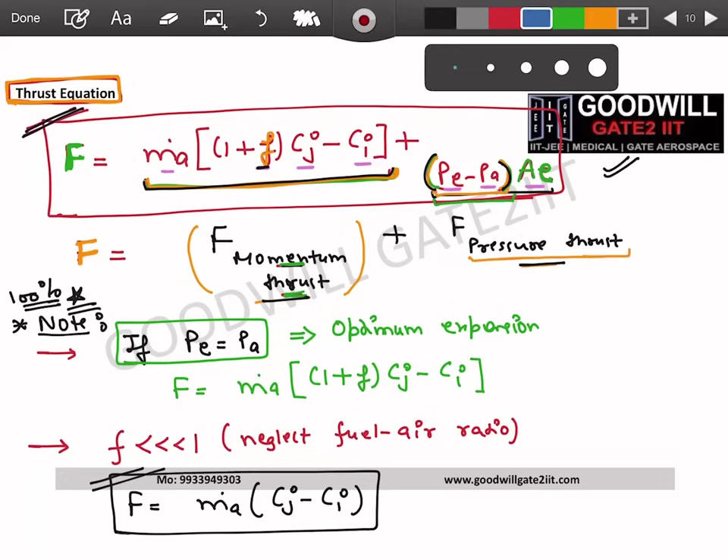But keep this in mind. This is the most accurate equation without any assumption. If you have optimum expansion, then only you make this term as 0. And then if you neglect these small things, you end up with a very simplified expression. People have done it so that they can ease the calculations, no other motive.

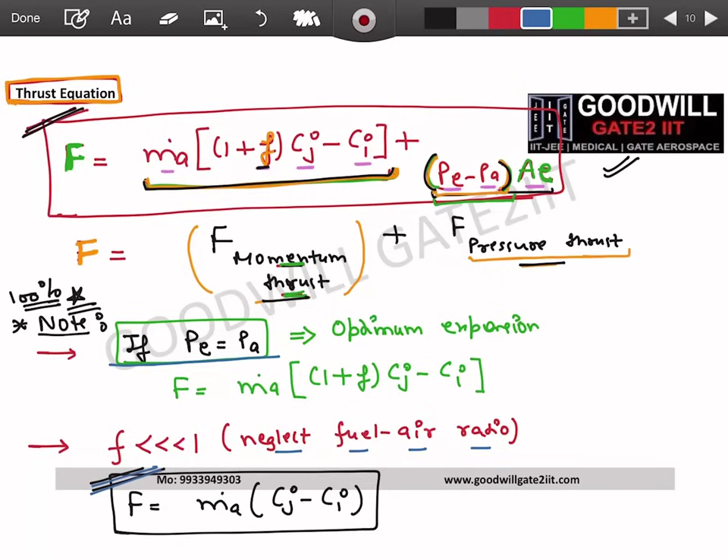Now, if you keep this note in mind, I'm going back to my efficiency expression. Can I write this expression as A minus B whole square? Can I take M dot A into Cj minus Ci as thrust? Let me write that expression. After all the assumptions, this was our thrust expression, right? So I'm taking this M dot A and one bracket out of it. If anyone has any confusion, just follow. I am writing this as F divided by 2 into Cj minus Ci. Everyone agrees on this step, or anyone having any question or concern on this?

Clear, right? And then in this step only, so that I need not write this again, I'm taking Ci common, guys. So when you take this Ci common, do you agree if I write this as... now this is the expression I want you to be comfortable with mathematically. So if you agree, I can cancel out this and this term. I can take F into Ci common from denominators and it gets cancelled out with the numerators. And what are we left with? 1 divided by 1 plus 1 by 2.

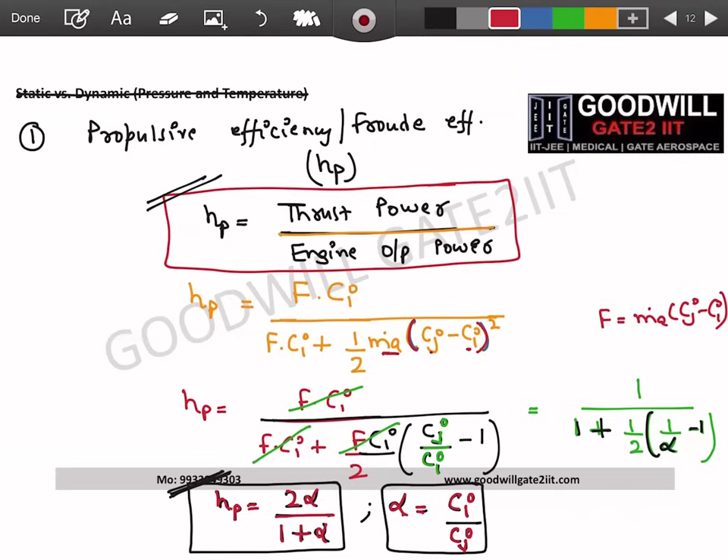So we have learned the first efficiency, which is propulsive efficiency, the ratio of thrust power to engine power. Give me a quick nod if this is fine for all of you. Is this making sense? Clear, right? Second, you need not do much manipulation. The second efficiency is thermal efficiency, which is engine output power divided by heat power. If you want, you can write the expressions. I just want to write it so that you are okay with your notes.

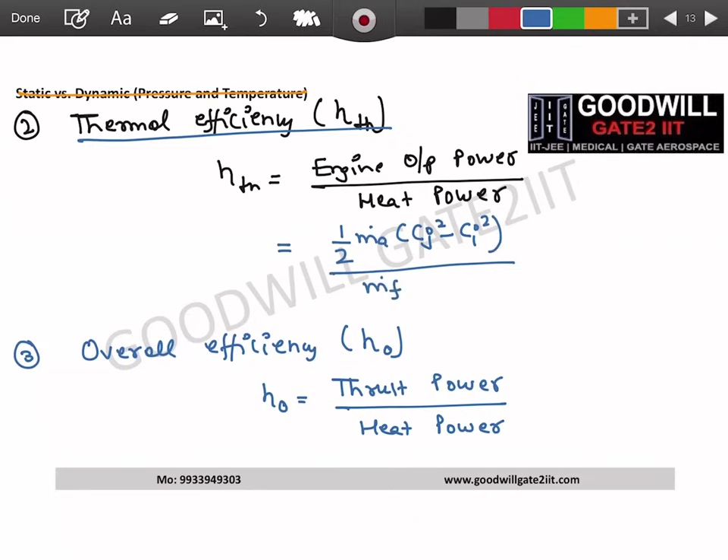Engine output power is nothing but half of m dot a into Cj square minus Ci square, divided by heat power, which is m dot f into CV. So you can learn all of these formulas. Now, if you open books, people write this m dot f by m dot a as f also. So if you understood, it will be clear to you. You will find this formula also in many of the books.

Are we okay in this formula? It is nothing fancy, right? Guys, are we okay? You know, fuel air ratio is nothing but amount of fuel divided by amount of air, right? So, same equation, written in a different manner. And similarly, if you want, you can write thrust power as thrust into velocity, and heat power is m dot f into cv. Nothing else, nothing fancy. These are more than enough formulas.

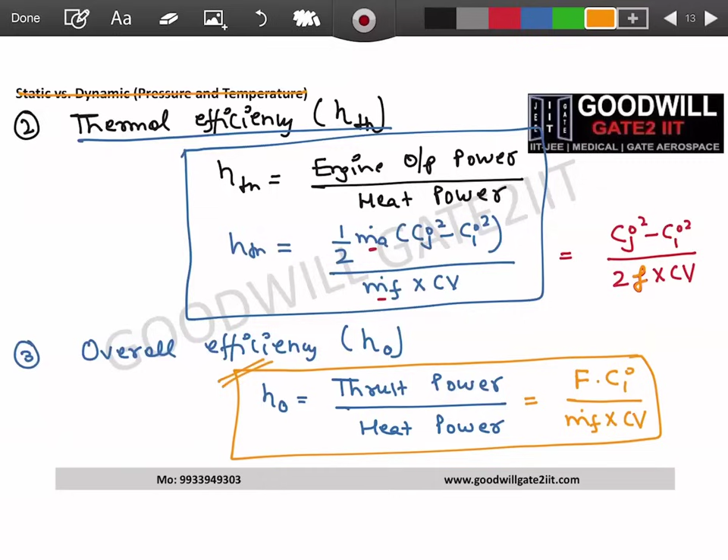They will try to jumble up keywords. They will try to confuse you with given statements. We just want to practice, and that's what we are doing this for the entire year, right? We're just practicing more questions, practicing more numericals so that you have doubts and you can get them sorted and clear. Now, I can do multiple things in this, which we will do tomorrow.

I don't want to push everything in one lecture because this is the first lecture. I want to keep it proper, not too long. What we will do is we will derive this thrust power expression in the next lecture. We will maximize it and then we will see different conditions. Now, before wrapping up and opening for doubts, this is the point I was making.

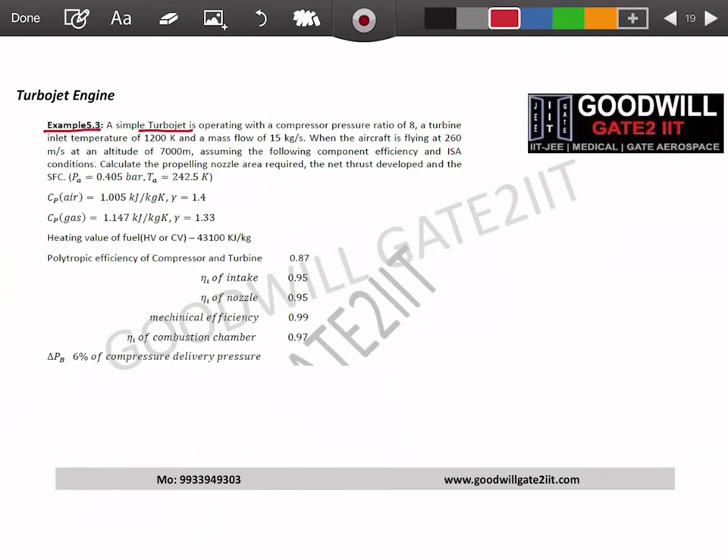If you go into the syllabus now, today in the lecture we have discussed the thrust equation and efficiencies. And that's how I will be talking about each and every topic and each topic's numericals. Now, if you see my whole slide, once we are done with all these things, we will solve a very big numerical on turbojet engine. This will open many concepts in your mind. Believe me, you will become super strong in this topic once you do this numerical.

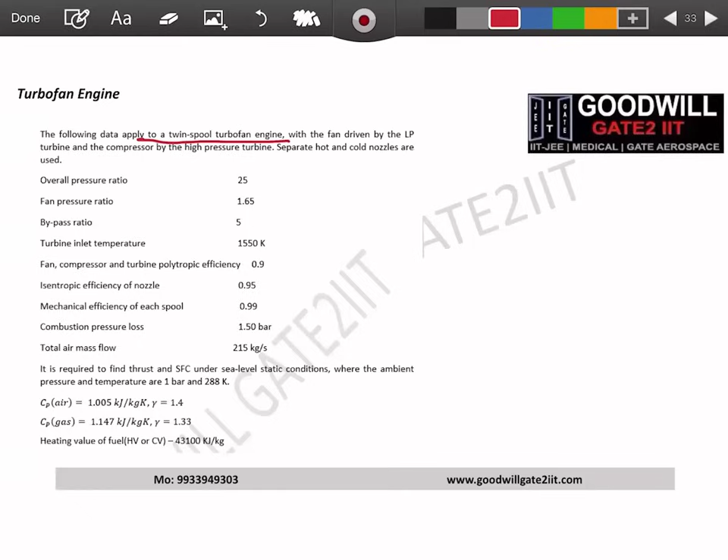Once we are done with this, then we will go to the second engine, the turbofan engine, and we will solve a big numerical on turbofan engine. I'm telling you my process, how we will do this lecture. And the same thing we will do on ramjet, scramjet, turboprop, and so on. Now, just to show you, because you should know how lectures are conducted afterwards, I want to show you another slide here. Just give me 1 minute. Let's say I have opened this slide. Once these topics are done, we will enter into GATE numericals.

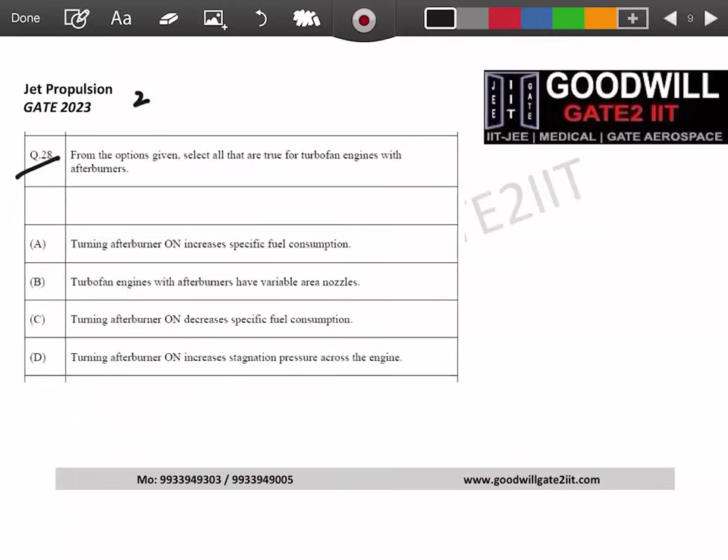If you see 1, 2, 3, 4, 5, 6. 6 questions in 2023. And if you count the marks, this is a 2-mark question, this is a 2-mark question, this is a 2-mark question, this is a 2-mark question. So 8, 1, and 1. So total 10 marks, only one chapter. I'm not saying the whole syllabus, only one chapter of jet propulsion.

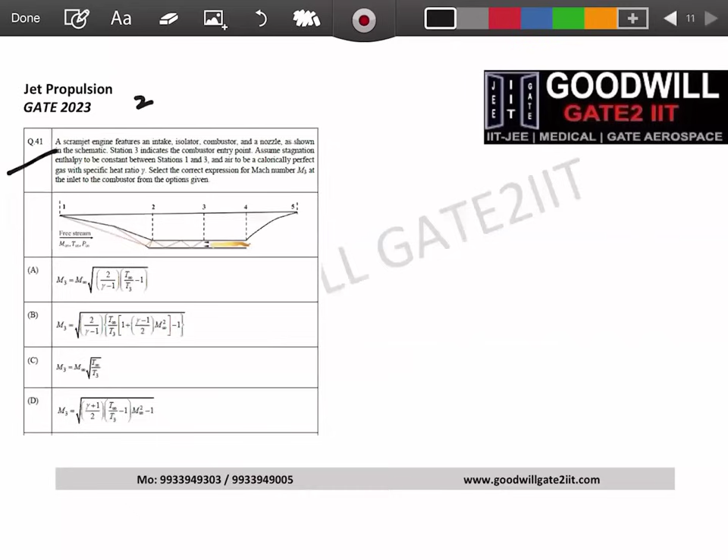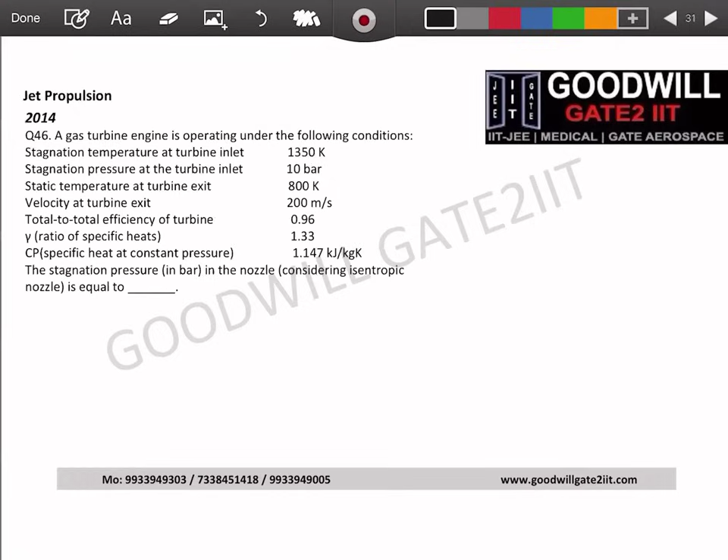So in jet propulsion, they have already asked 80, 90, 100 questions in your GATE exam, guys. I hope you can imagine why I am stressing this topic so much. And if you make this topic a strong topic of yours, you are in a position, from the first lecture only, to score around 8 marks in your GATE exam. I told you a very conservative 6 marks, but you can see it can even go to 10 marks. And this is the reason it's a huge topic.